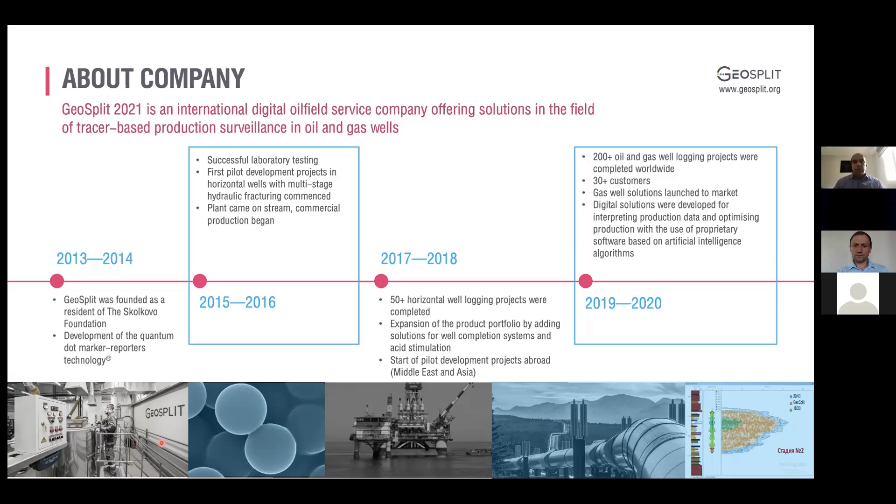So this is the agenda. The first part of the presentation, I'll spend explaining the Geosplit product portfolio, the quantum dot inflow tracer technology, how we use it in different applications, primarily in single wells and then multi-wells. And then I will spend the second half of the presentation explaining how we started using this data in an integrated workflow in the quest to improve field and reservoir management, ultimately achieving better hydrocarbon recovery.

I will touch base on what we are focusing on from the beginning of this year onwards, which is data-driven models and machine learning, where we are trying to give the end users an ability to automate and better design the field development. I will also spend a couple of slides at the end explaining the Geosplit unified digital platform, which is proprietary software that we developed, basically a central dashboard that we use internally and that the end user can also use in analyzing different field development strategies.

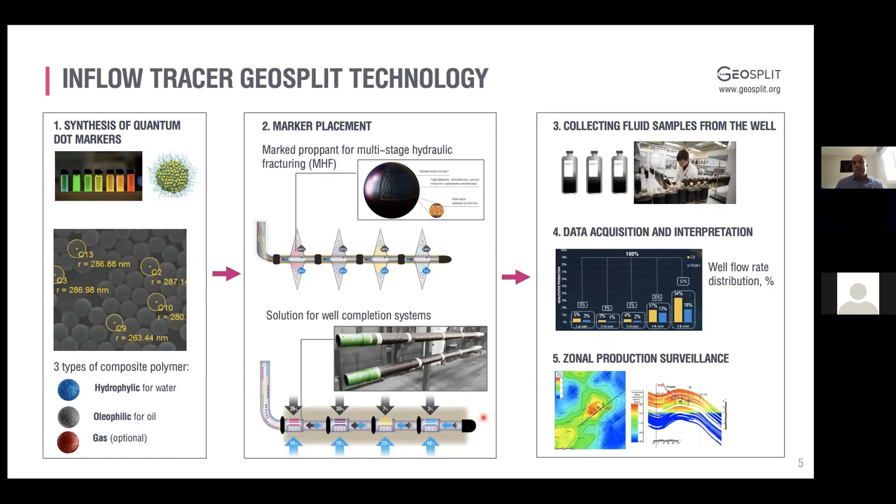And the key concept here is that when you introduce a sample, any particles that are less than 2 microns will be passing through the tube one by one. And then when they are exposed to different laser channels, we capture that response with in-house built software, which has machine learning capabilities just to ensure the accuracy and efficiency of the analysis. And we basically quickly sort the different tracers or markers present in the sample, and this allows us to produce quantitative analysis of production flow.

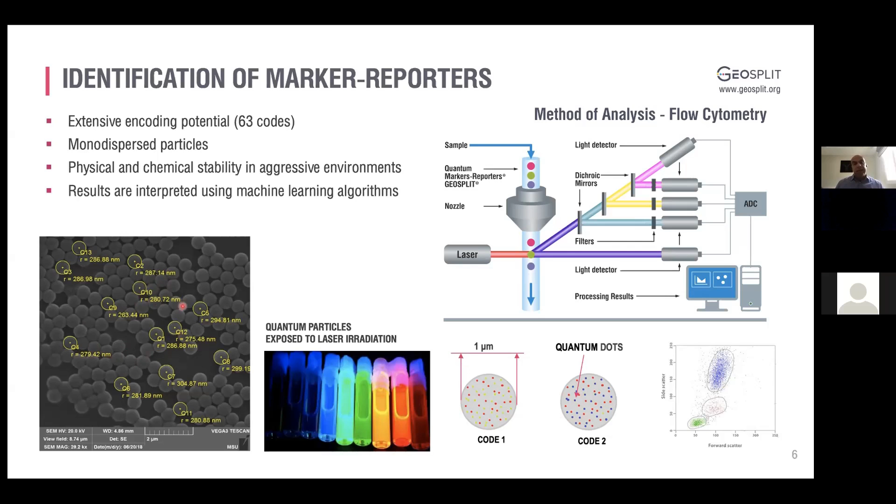So how does the release mechanism work? As I mentioned, we place the polymeric spheres in a composite material, which is an inhomogeneous material, and it is pre-designed depending on which fluid phase we would like to trace. So we have a material for oil, a material for water, and also for gas.

So what happens is that once the flow gets into contact with the material, it slightly swells, and then diffusion channels are created. And then when there is enough kinetic energy or flow velocity, the polymeric spheres are released in the flow and then carried to surface. There is actually a direct or linear relationship between the number of those polymeric spheres and the flow velocity. And this is the key concept that allows this technology to produce quantitative analysis of all 3 phases in the flow.

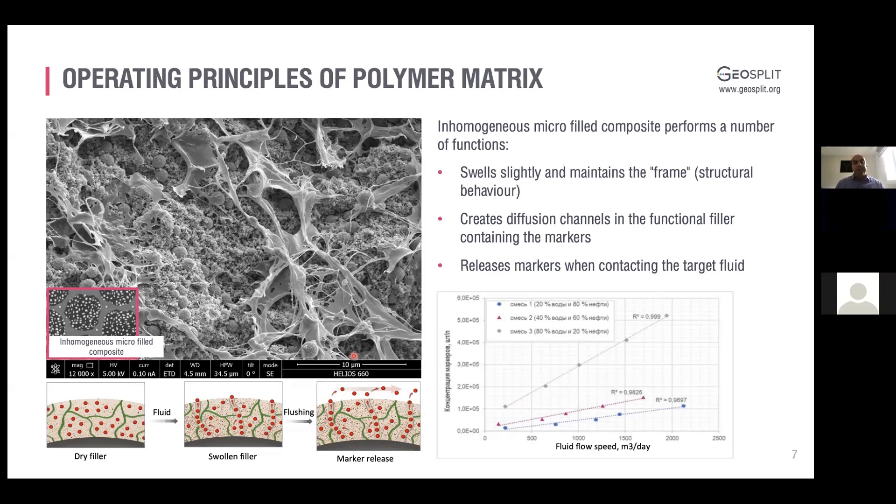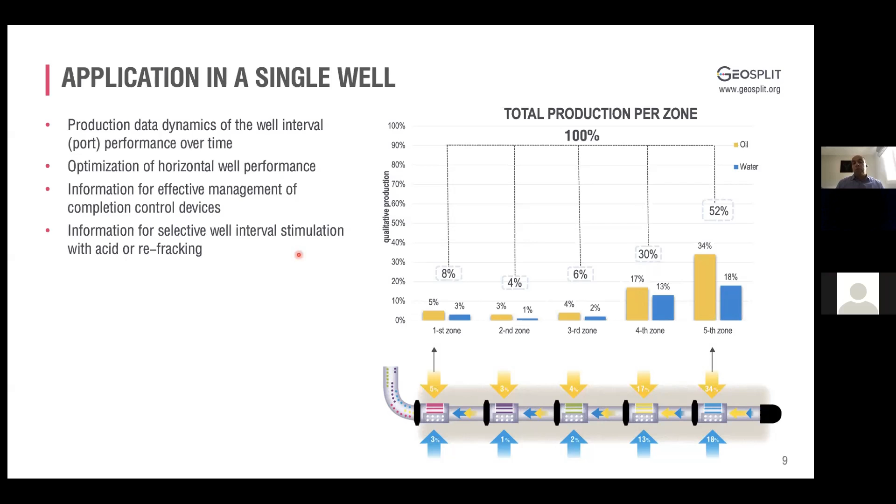Obviously, we provide this well performance over time, and now it gives better insights to the client to optimize the well performance, and to make decisions if the completion strategy needs to be changed in further wells to be drilled. It can also help in the scope of hydraulic fracturing to optimize the frac spacing, frac design, etc. In essence, it gives the next level of production data to the client or end user to be able to make better future decisions for field development.

When it comes to a multi-well environment, obviously placing inflow tracers in different wells in the cluster of the field can allow looking into the interaction between those wells, which then can improve methods like infill drilling, like enhanced oil recovery, which I will go into in more detail. And eventually it can help the client optimize the field appraisal and the field development.

Now, the key advantage of this technology to the client is the fact that when you place quantum dots, you don't need to shut off the wells to be able to do the production profiling. So you're avoiding production deferrals, or any unnecessary closure of the wells. This method is interventionless, so compared to any other conventional production profiling methods like coiled tubing or wireline conveyed PLT measurements, it substantially reduces the HSE and operational risks, and definitely it also reduces the cost.

And what we've seen in the last couple of years, this is the key factor now for the end user to do production profiling much more frequently than in the past, which means that if the clients used to do 1 PLT per year in each well, now they're doing more frequent, let's say monthly production profiling, which gives the client much more production data.

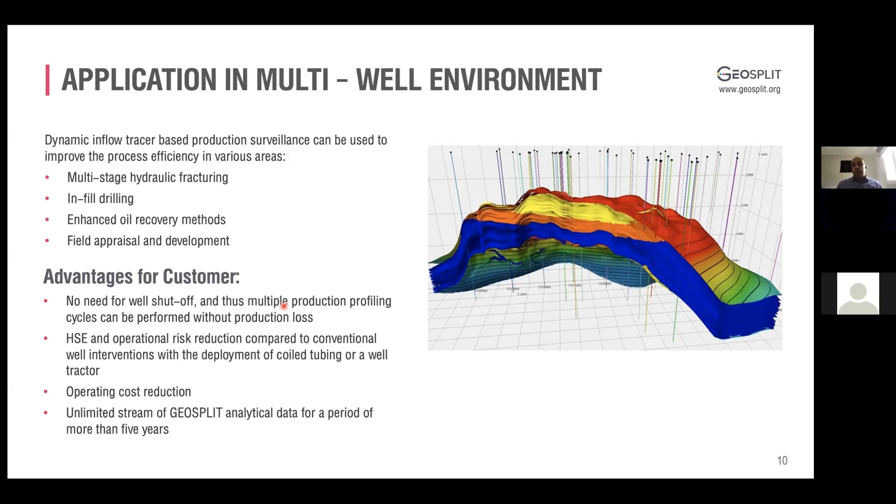As I mentioned initially, it gives the insights for better decision making in optimizing the production, etc. But now with this big data, the client is able to use it in data-driven models, for example, to improve reservoir models, hydrodynamic models, or use such data-driven models in automated or better predictive analytics and do more accurate decision making in the future.

So just a quick number crunching, to show the cost advantage. This is a case back in Russia with a client that had a certain AFE budget for drilling horizontal wells over a 4-year period, and the initial strategy called to drill 500-meter horizontal sections in each of those wells. Early in the field development, the client adopted the use of inflow tracers back in 2017, and ultimately within 4 years, just by using the inflow profiling, the client started reducing the horizontal section while maintaining the production, basically reducing the capex cost in the field, which totaled 3.5 million in this case, a substantial cost reduction.

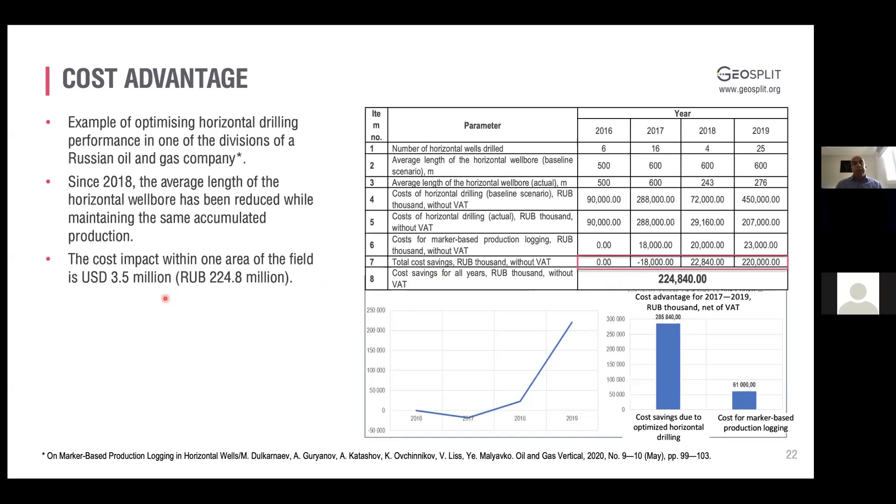So when the client started putting the well on production, we could quickly see that the middle section of the well is not contributing to production. And immediately this is an insight for the client to use this data in subsequent future wells that are also horizontally drilled and fractured. So the client decided to change the frac spacing, avoiding the low porosity and permeability zones, i.e. saving the operating costs during the fracturing operations.

This is a multi-well case study, also back in Russia, where a client was developing a field where they were drilling the wells to be immediately fractured. The wells were fractured with 5 different stages. The client started measuring the production on a regular monthly basis, and they started getting quite unique profiles: J-shaped, which means that the production was predominantly coming from the heel, L-shaped, where the production was predominantly coming from the toe, and U-shaped, where production was coming from the heel and the toe.

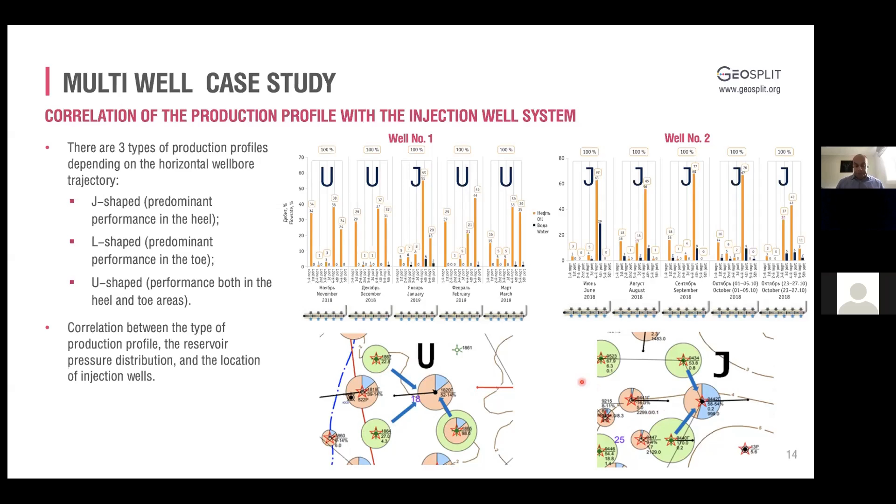So the client had a more systematic approach with a workflow where they were looking at the existing reservoir geological structure. They also looked at the existing historical production and injection profiles, looking at the water cut patterns, trying to understand the efficiency of water flooding, etc. Now, what Geosplit jointly did with the client is start using data-driven models in steps 4 and 5, and I'll go into detail. Basically, we started using the data that we are getting from production profiling of different fracturing stages in each well in data-driven models, using probabilistic models like the Spearman rank order correlation method or capacitance resistance method.

And those models were not a replacement of existing simulators, but rather complementary to the existing simulators. But definitely such data-driven models are much faster and more efficient in data crunching, which enables the end user to generate different scenarios, for example, just changing the injection profiles, and to make quick decisions to optimize the injection profiles.

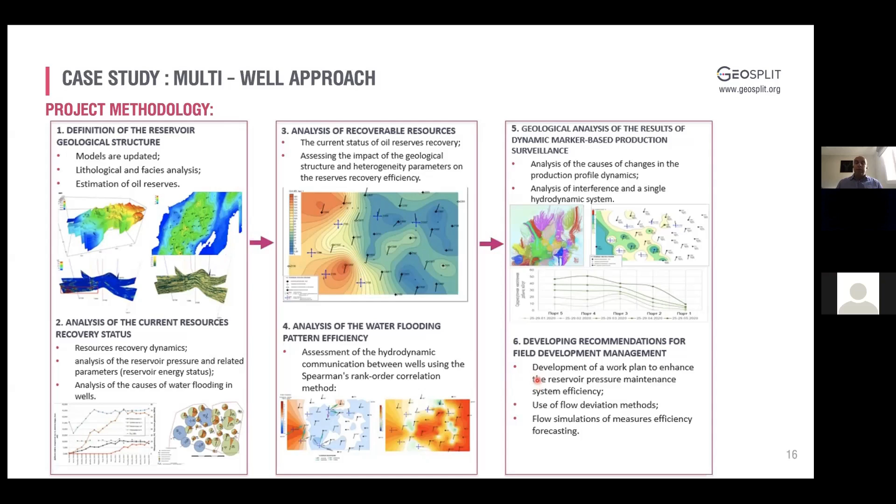Just to benchmark the results, this method was compared with the existing hydrodynamic reservoir model, and it was concluded that areas 1 and 2 in both methods were the ones that give the best reservoir drainage.

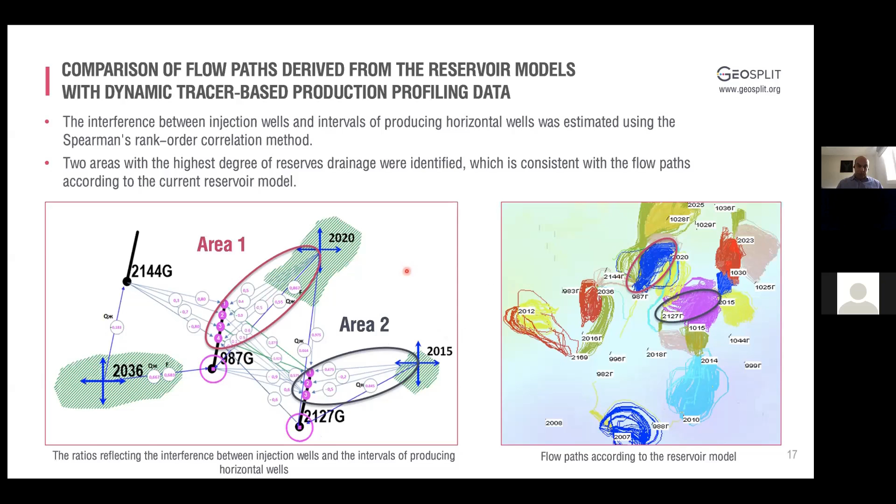Now, once those data-driven models were implemented, the end user was able to create a set of actions ranging from switching the producers to injectors in the areas where there is extremely low production of oil and high water cut, and that would definitely improve the efficiency of the waterfronts. They also looked at pressure management within the reservoir. So in the areas where the reservoir pressures were low, it was decided to do stimulation interventions just to remove the filter cake and reduce the skin.

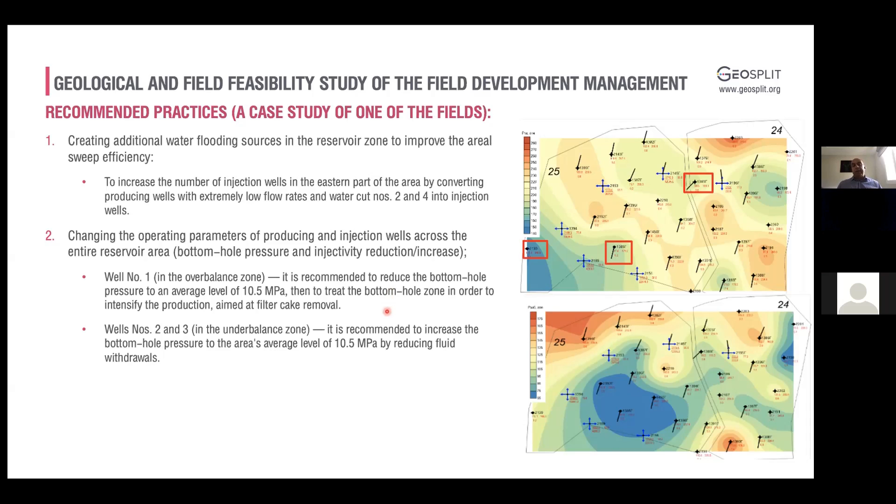And in some other wells where the production was quite higher than the other parts of the field, it was decided to choke back the production to maintain the drawdown and the reservoir pressure. Further on, certain thief zones were identified between injectors and producers. So the decision was made to use polymer systems to plug those thief zones. Another decision was to do infill drilling just to intensify the development of remaining oil in place.

And all those basically allowed the end user to increase the average flow rate per day by 1.9 tons per day, which would eventually give the client an incremental production increase of 1,900 tons over 8 months. And what was more important to the client in this case study was to reduce the water cut. In some areas, the water cut reached even 70% on individual wells. And with this model, the client was targeting to reduce the water cut by at least 20%.

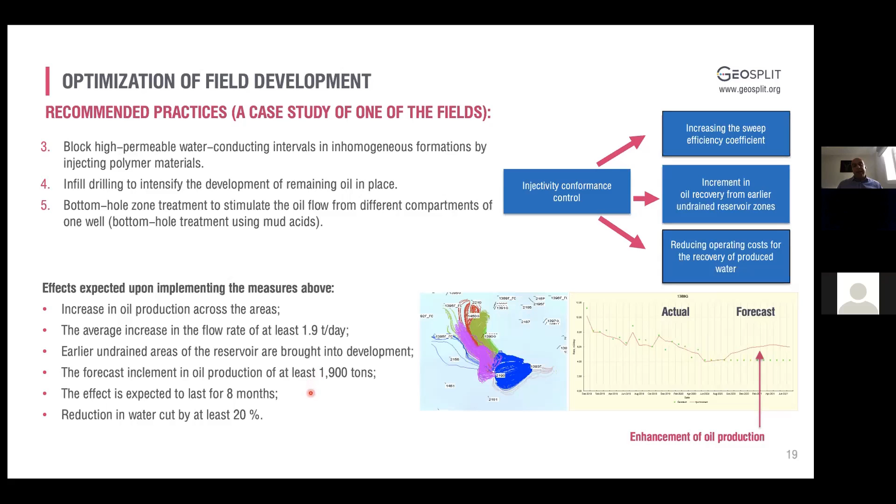So now going a little bit more detailed into the data-driven models that were used. One of them is the capacitance resistance model, which is not new in petroleum data-driven analytics, but what's specific in this case is that the production profile is not only looked at on each individual producer level, but rather at every single hydraulic fracturing stage in the case history that was explained. Such models don't carry better accuracy compared to the existing physical models, but they are much faster and more efficient to create different scenarios for better decision making.

Obviously, one of the validation methods is to look at the reservoir simulator and the production history matching between the two models. A couple of disclaimers: such model accuracy increases when there is a lot of historical data, and we are looking primarily at injection profiles and production profiles of each producer on a frac stage level, and also at the injection pressure. So the more data we have, the more accurate the model becomes, which allows better prediction for the future. Since this is a fairly new implementation, the few case studies that we did carried only two years of production history.

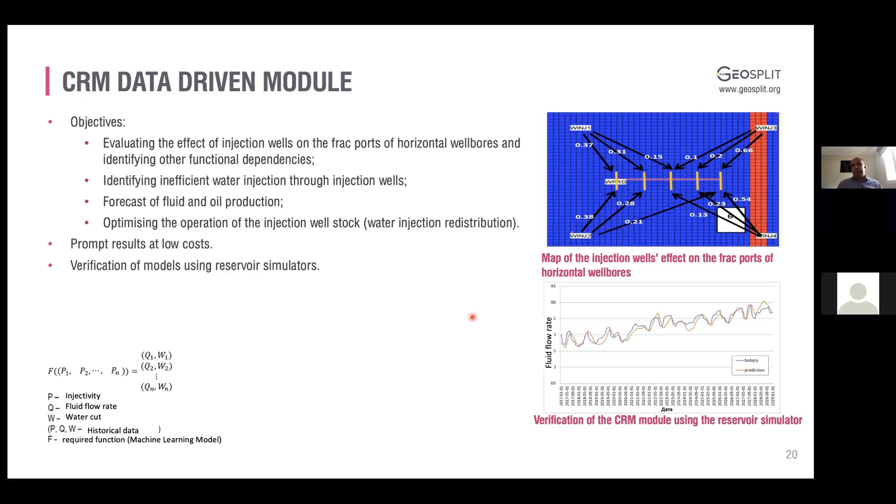And with the coefficients of interference now established, you can quickly make decisions like: is the water injection potentially inefficient from injector well number 3 to producer well number 1, just looking at the correlation of interference coefficients for specifically water cut and fluid flow rate.

What we would ideally want to have is a typical piston flow where the waterfront is pushing the oil towards the producers in almost 100% efficiency. And what we were trying to avoid is obviously the water breakthrough.

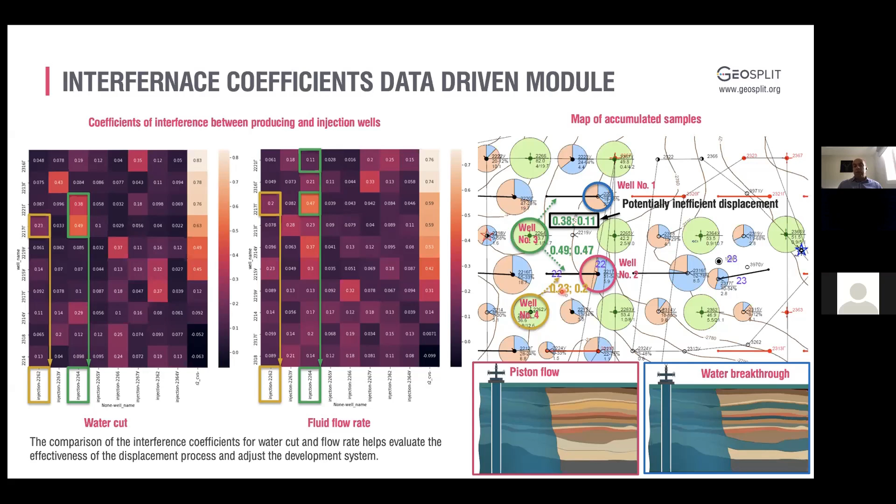So just at the end, as I mentioned, Geosplit most recently developed a unified digital platform, and the whole idea is to have a one-stop shop of all the input data needed for every single well, field and reservoir. And then with the combination of existing probabilistic or data-driven models and Geosplit algorithms that we are developing, ultimately we would like to give the end user a tool that would allow an automated system for all field development and real-time control.

So just quickly, this joint data center obviously has data from production profiles generated by using Geosplit inflow tracers. We also gather the data from the end user when it comes to the geological model, the petrophysical models, etc. And then we have a centralized system that uses all this data and machine learning algorithms to visually provide the insights to the client and ultimately better decision making.

We have two trademark modules, GeoExpert and GeoOpt. GeoOpt is still in development phase, where we want to provide plugins to current commercial reservoir simulators like tNavigator or Eclipse, so that the data obtained from inflow profiling using Geosplit marker reporters can be fed into those models. And GeoExpert is what we are focusing on now, to develop in-house data-driven models that can be used for predictive analytics and better decision-making for the end user.

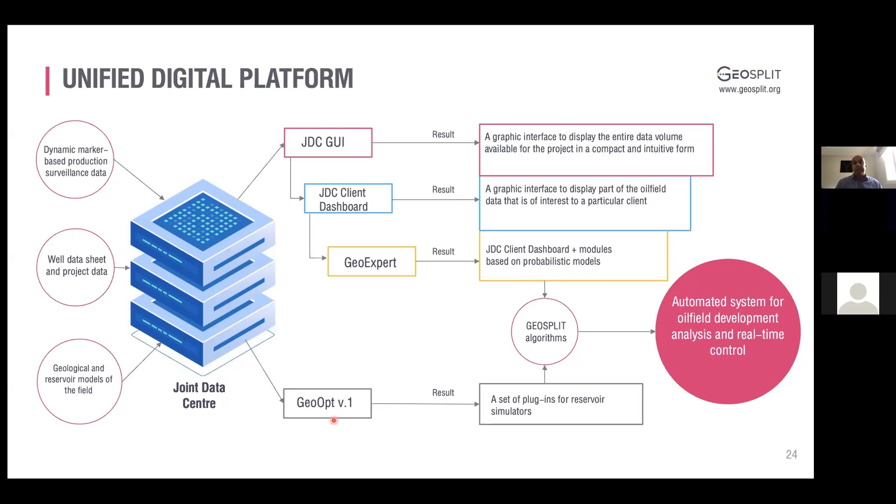This is the last slide, showing the typical dashboards from the Unified Digital Platform. What we are trying to give the end user is business intelligence and analytics visuals that allow the end user to better understand the data and make decisions. The input is now automated. The data is centralized in one center. We also have a hierarchical storage of documents on stage level, well level, field level, reservoir level, the client level, etc. And such architecture also allows better data processing, analytics, and visualization.